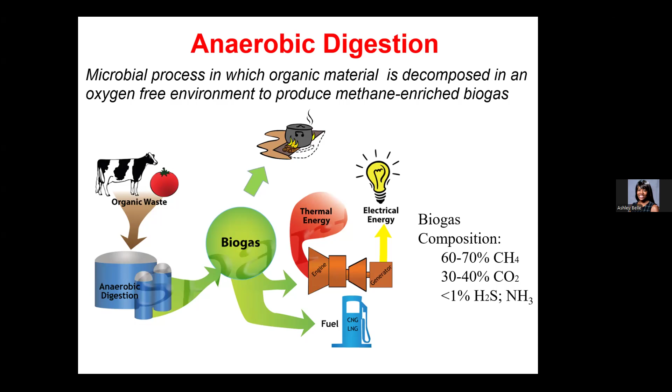Or you could even have biogas that is cleaned or upgraded. That means that we are removing the carbon dioxide and leaving only the methane behind. This gas can then be sold to the natural gas pipeline, or we can compress that upgraded gas and use it as a vehicle fuel.

Now, with anaerobic digestion technology, there are multiple applications, ways in which this technology can be used. It can be used at a smaller scale, like with a household digester. It can be used to divert food waste from being disposed of at the landfill. You may see them at a wastewater treatment plant, as well as at a farm where they're handling manures or crop residues.

So I do want to point out that even though the design of the digester may vary depending upon the organic materials that are being digested and decomposed, the same microbial based process is responsible for producing this methane enriched biogas. All right, so let's take a closer look at some of these applications.

So maybe in a developing country, you may find a small scale anaerobic digester located right in someone's backyard. It may look like this here. And they may digest manure if they have a few cows or a few pigs on their property, as well as any food scraps that they may have. This will produce enough biogas for maybe preparing 1 or 2 meals each day.

So here we have their stove with their biogas burner. But since biogas has a lower energy density in comparison to natural gas, which is made up of primarily methane, you may notice that the orifice on their stove where the gas comes out is larger.

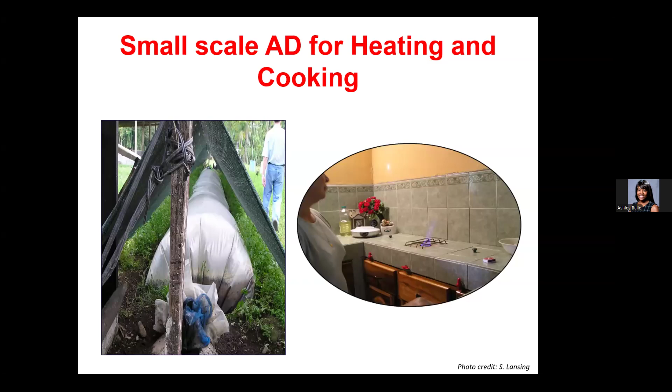And then, due to its high organic content, so there's lots of carbon in food waste, anaerobic digestion has also been used as a strategy for diverting food waste from the landfill. We may have heard that the US EPA estimates that more food is actually reaching our US landfills than any other materials, and this contributes to nearly a fourth of our municipal solid waste stream.

However, we are starting to see more and more states actually starting to ban their food waste from entering the landfill. So you'll see composting and energy recovery methods, such as anaerobic digestion, being increasingly used to handle this food waste. So if we divert this food waste from going to the landfill, not only are we saving space in the landfill, but we are also decreasing methane emissions that would otherwise escape into the atmosphere if we take advantage of digestion technology.

So we can also have an anaerobic digester at a wastewater treatment plant, and these are used to treat sewage solids. So those are the solids that are left behind after the wastewater treatment process. And shown here in this picture, we have the Urbana and Champaign sanitary districts. This is their Northeast treatment plant.

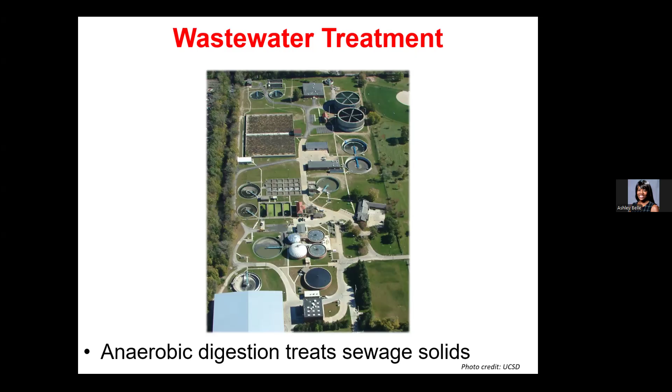So at this particular facility, they have 4 anaerobic digesters, and they handle things such as sewage solids, fats, oils, and grease, as well as food waste. And so for this particular facility, they use their biogas to generate electricity and heat for their plants, as well as they burn off with a gas flare a small percentage of the biogas that they generate.

All right, so moving on to our agricultural digesters. So instead of allowing methane gas to just escape into the atmosphere as livestock manure decomposes in an open lagoon where it contributes to greenhouse gas emissions, farmers have been encouraged to actually use anaerobic digestion technology to capture that methane and to use it as a renewable form of energy. So these particular digesters can be used to handle manures such as dairy, poultry, swine, as well as crop residues.

So I actually spent my graduate studies at the University of Maryland College Park, where I conducted digestion research at a USDA dairy farm. So I am most familiar with dairy manure-based digesters. So that's kind of going to be some of the focus of today's talk.

So I have another question for you. Anaerobic digestion is a microbial process where organic material is decomposed in an oxygen-rich environment to produce methane-enriched biogas. Is this true or false? All right, great job. So the answer is false. It requires an oxygen-free environment.

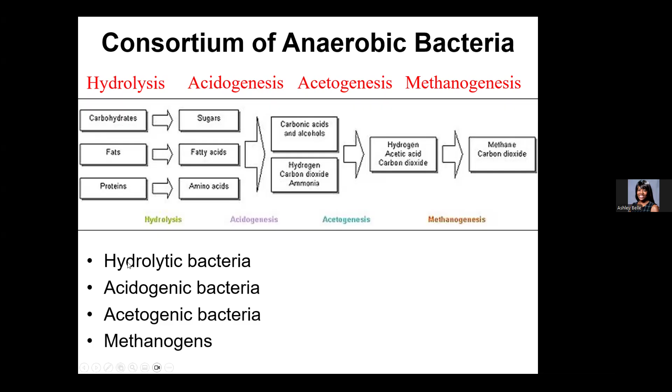And then in acetogenesis, those bacteria take those volatile fatty acids and they break them down into acetate and hydrogen and carbon dioxide, which are needed for those methanogens to create that methane-enriched biogas. So there are lots of different microorganisms in play in this process.

So we've talked about that anaerobic digestion technology. It can provide us with renewable energy, as well as when we capture that biogas, we're reducing methane. We're capturing that methane, so we're reducing greenhouse gas emissions. But I also want to point out that there are some additional benefits of anaerobic digestion.

And another product of the digestion process is effluent. So with effluent, this is the undigested solids and the liquid that comes out of the digester. So post-digestion, you can have solids and liquids that can be separated. And while the liquids can be used as, say, a fertilizer, this actually helps the farmer to reduce the need to purchase a commercial fossil fuel-based fertilizer, because during the digestion process, those nutrients become more readily available for plant uptake, because during digestion, those organic nutrients actually get converted to an inorganic form, which is favorable for plant uptake.

And then those solids that come out of the digester can be composted, and this creates a value added product. So you're able to generate a new revenue stream potentially, because those composted solids can be used as, say, a potting media for plants. You may see a farmer reuse it as bedding, or even some may use it as a soil amendment.

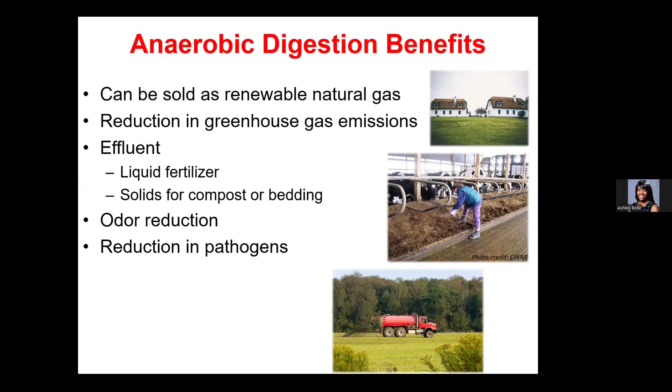All right, so we've talked about all of these microbes that are at play. So since we have this microbial process going on, the amount of biogas that is produced is going to depend upon the characteristics of the waste materials, as well as how you are actually operating the digester. So these here on this screen are some key factors if we want to maximize the amount of biogas that we're producing. So one of those being pH. Now with this microbial-based process, pH is going to play a very important role. It is very ideal for our digester pH to be maintained between, say, 6.5 and 8. This pH is optimal for methane forming bacteria.

Now, I do want to point out to you that digestion of food waste can have its limitations, because sometimes with food, especially fruits and vegetables, if they have a high simple sugar content, that material can break down so rapidly that you can get an accumulation of volatile fatty acids. And of course, those volatile fatty acids can cause the pH of the digester to drop. So when you have that pH drop, it can have an inhibitory effect on those methane producing bacteria from producing methane. So that's why oftentimes manure is actually placed into an agricultural digester with the food waste, because that manure has a good buffering capacity to help resist the changes in pH in the digester from that food waste that has been added.

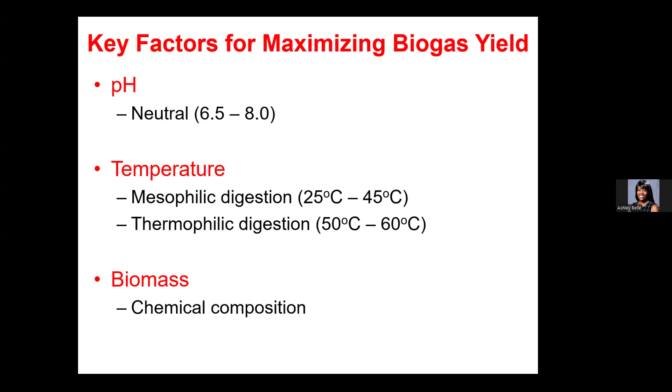And then again, the feedstocks you select should also be taken into consideration, because organic feedstocks with simple carbs, proteins, and lipids can be broken down rather quickly. So they're actually ideal for anaerobic digestion. Whereas if you have a feedstock that has a high lignin content or a high cellulose content, that's going to tend to be more resistant to microbial degradation, and it may need some additional pretreatment steps before being placed into the digester.

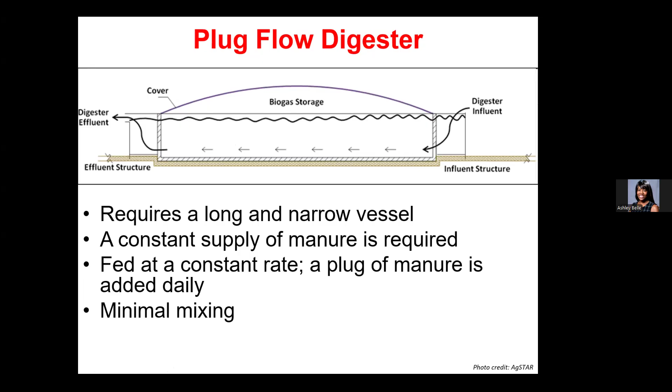So let me give you an example. Let's say that this particular digester is going to have a 25-day retention time. So that means if I put in a plug of manure on day one, it's going to travel through the system over those 25 days. And on the 25th day, when I put in another plug of manure, that digested manure, that first plug I put in, is going to exit out of the digester. This particular design is also considered to be a more simplified system because it involves few mechanical parts.

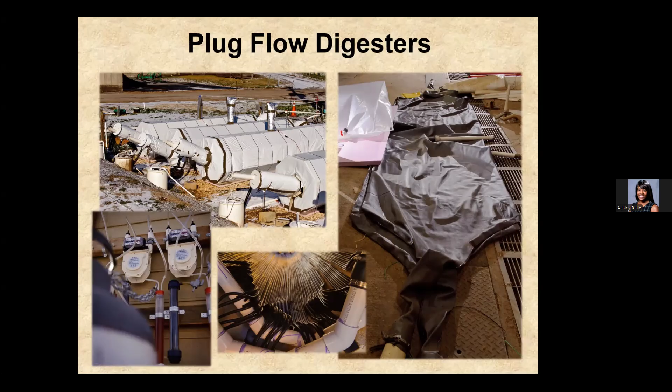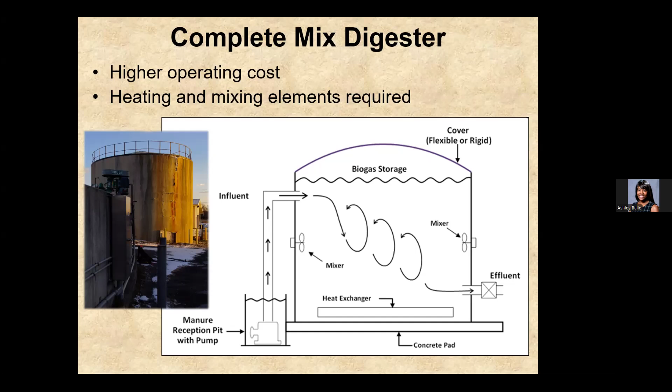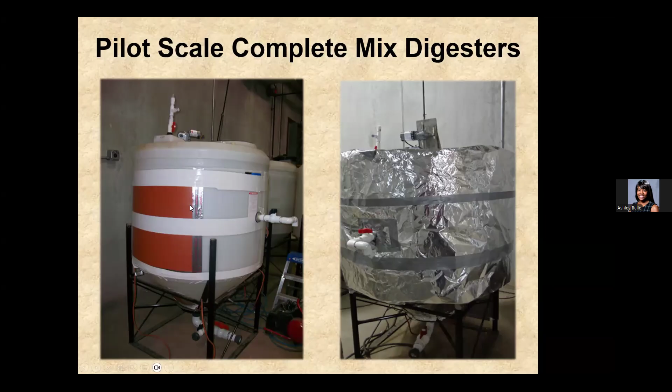All right, so shown here, these are some pictures of some research pilot scale complete mix digesters that we designed for field studies at the Beltsville Agricultural Research Center. So you can see here that these digesters were constructed from 850-liter conical tanks. And so these are plastic tanks. And we actually equipped these digesters with some silicone adhesive blankets in order to maintain that 35 degrees C digestion temperature. But we actually noticed that we were losing heat. So we actually built these reflective foil frames here around the digester to help encapsulate that heat.

And we also wired the digester's temperature control panel to continuously monitor and simultaneously control the digester's internal as well as the external temperature of the digester. So when that manure inside of the digester dropped below 35 degrees C, the heating blankets would turn on. And then for mixing, we wanted to minimize the settling of the solids in our digester. So we actually made these top mounted stirrers and we used gear motors as well as these custom made stir rods that went down into our digester.

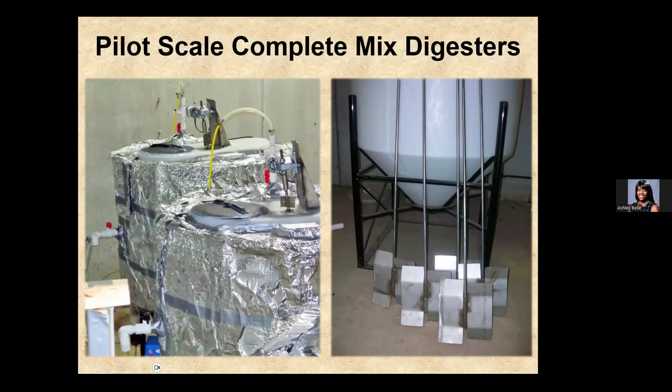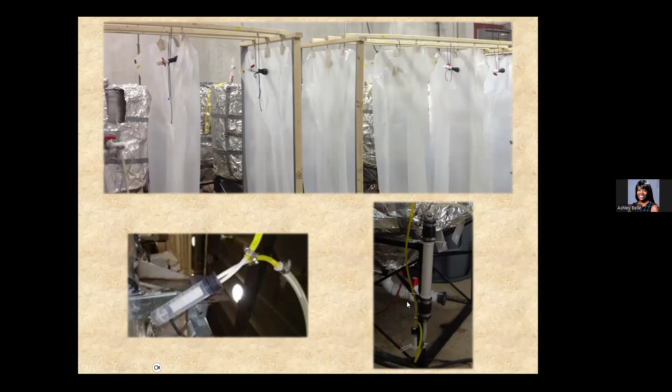Now, this is our finished product. So how our research complete mix digesters operated, we would pump in our manure into this bottom port right here. And on each digester, we installed these water sampling ports so that we could collect water samples to measure pH or volatile fatty acids because we wanted to know what was the health, what was the chemistry going on inside of our digester. And as biogas was produced, it exited the digester through this biogas collection port.

And you can see here, this is where we actually collected the gas sample to measure how much methane was in our biogas. So then the biogas flowed through the biogas collection port, and then it went through this moisture trap and desiccant trap to remove the water before it went into our bags. So you can kind of see down here, there's some discoloration at the bottom. So that means that desiccant is wet from the biogas actually flowing through it. So periodically we would have to change out this desiccant here.

Now, let's talk about the status of anaerobic digestion in the US. So AgSTAR tracks the status of US agricultural digesters as people voluntarily report that they have a digester. If you're not familiar with the AgSTAR program, it's a collaborative effort between the US EPA and USDA. They're encouraging the adoption of this technology because they want to reduce methane emissions that are associated with the livestock industry. So they want them to capture this generated biogas and use it as a renewable form of energy.

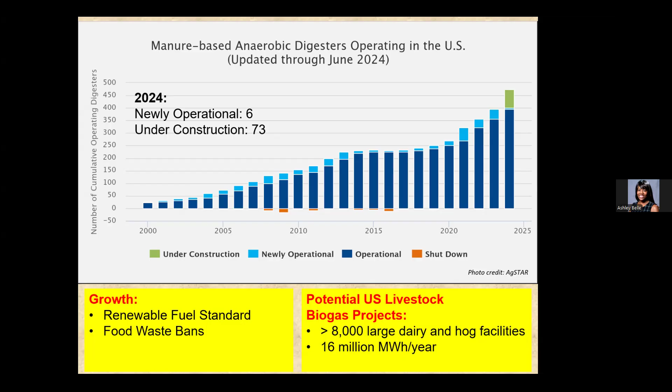So I kind of want to back up a little bit to point out Illinois for you. According to our AgStar database, in Illinois, we have 3 manure-based digesters that are operating. So up near Freeport, there is a digester that's operating at Hunter Haven, and that's using dairy manure. And then down in Peoria, that is another dairy, and that's Hillcrest Dairy. And then up near Galesburg, there's a pork digester that uses a covered lagoon. But I want to point out that with all of these digesters, the end use for their biogas is cogeneration, so heat and power.

All right, so let me launch another poll question here. Most digesters operating at livestock facilities in the US use what type of manure? Beef, poultry, swine, or dairy? All right, the answer is dairy.

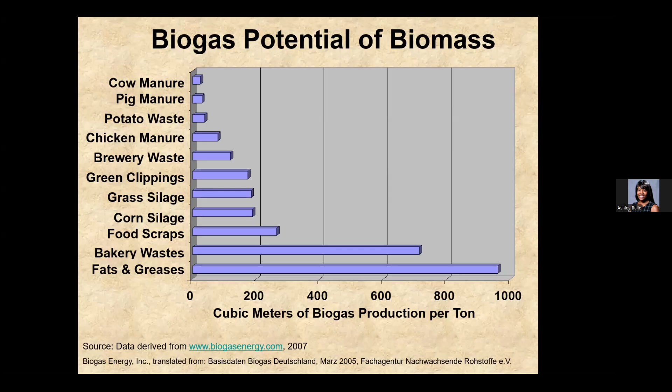Well, the answer is through co-digestion. So co-digestion means that you're adding another organic feedstock to the dairy manure, which can increase the biogas yield. And this can be a possible solution for making anaerobic digestion technology viable for the small to mid-sized livestock facility who may have been once limited by their animal waste capacity.

So I have actually conducted research looking at ways to increase biogas production of dairy manure-based digesters. Some of my research has focused on investigating forage radish cover crops as a renewable source of energy and using this particular cover crop as a co-feedstock to increase biogas production of these manure-based digesters. When I say co-feedstock, I mean that we are adding radish cover crops to the dairy manure digester. And here we have our forage radish down here. So you may be thinking, what led us to study forage radish cover crops as a co-feedstock for these dairy digesters?

Well, at this particular point in time, there was increased interest among farmers who were growing forage radish as a winter cover crop because they wanted to achieve multiple soil and environmental benefits. Typically, this forage radish is planted immediately after they harvest the corn silage about mid-August. And the cover crop doesn't compete with food production, as most dairy farms have traditionally left their fields bare after the corn silage was harvested. This forage radish was attractive to farmers because it increased crop yield and suppressed early spring weeds.

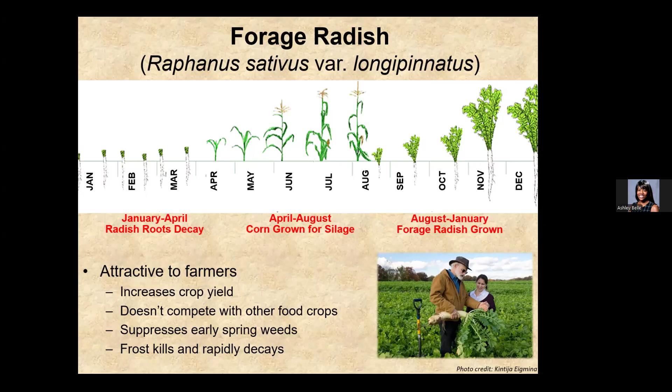Now, typically, this forage radish would not be harvested because after several consecutive nights with temperatures below -6 degrees C, this radish crop would winter kill, typically in late December or January, and that crop would rapidly decay, leaving behind this clean and enhanced seed bed. So for our research, we thought, could we possibly obtain another benefit from this radish crop by harvesting the above-ground biomass prior to winter kill and using it as a co-feedstock in our digester with our manure to increase biogas production? And we figured out through our research, yes, we could do that.

So shown here, this is our co-digestion feedstock. We harvested the above ground biomass, and this consisted of the entire shoot plus a small portion of that fleshy root that extended above the soil surface. And by harvesting only the above ground biomass, those benefits of increased topsoil fertility, weed suppression, compaction alleviation, those still remained because that below ground root was left to decay in the field.

These are some pictures of us harvesting the radish. The radish was first mowed with a rotary mower as close to ground level as practical. This was about 3 to 5 centimeters from the soil surface. Then that windrowed radish was forage chopped and blown into an adjacent wagon for collection.

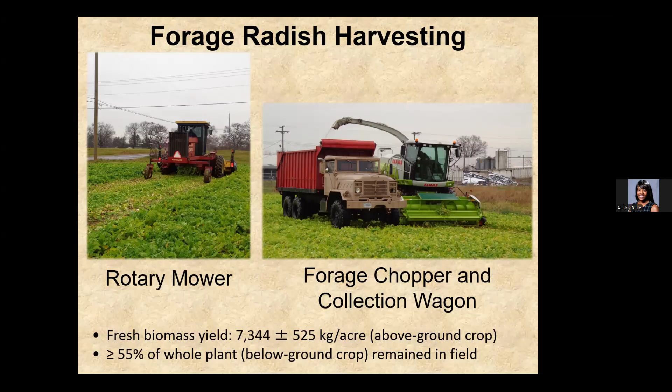And from this particular harvest, we collected about 7,000 kilograms per acre of above ground biomass. So it was actually estimated that we left at least 55% of that whole plant, so that below ground root remained in the field for decomposition. So this is just giving you a closer look at how the radish looked after harvesting. But it should be noted that radish has a high sulfur content. And so remembering we're working with a microbial-based process, sulfur can have an inhibitory effect on methane production.

So we're going to get a little bit into the research aspect of it. Now, we wanted to determine if co-digesting with radish could increase biogas yield. So we used 2 independent field trials that we conducted, and we used our research pilot scale complete mixed digesters for these experiments, and they operated in batch mode. So what I mean by that is that all of those organic materials that we placed into the digester on day 1 were allowed to digest over a 35-day period.

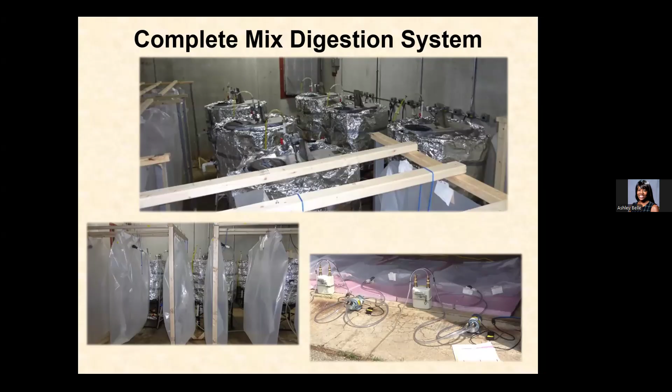Now, shown here, this is just a bird's eye view of our experiment. You can see that we had 6 complete mixed digesters here for each of our field trials. So for the field trials here, the digesters either contained a manure only or a radish and manure co-digestion mixture. So for trial 1, we actually utilized a 27% radish mixture and a 13% radish mixture in trial 2.

Now, I do want to point out to you that from our lab studies, although it was shown that increasing radish additions increase methane production, we actually decided to utilize these smaller radish loading rates because, for one, an existing dairy digester may not have the additional space to accommodate larger additions of radish. And then secondly, we also wanted to minimize clogging our digester system with solids. And we also wanted to avoid putting an excess strain on our digester mixers.

So if you look here, we have right here our radish plus manure digesters. Relative to its manure only digester, you can see that the radish plus manure digesters initially experienced a lag in methane production. Now, this could have been due to methane production being inhibited by the sulfur content of the radish, or a longer acclimation period was required to digest the radish.

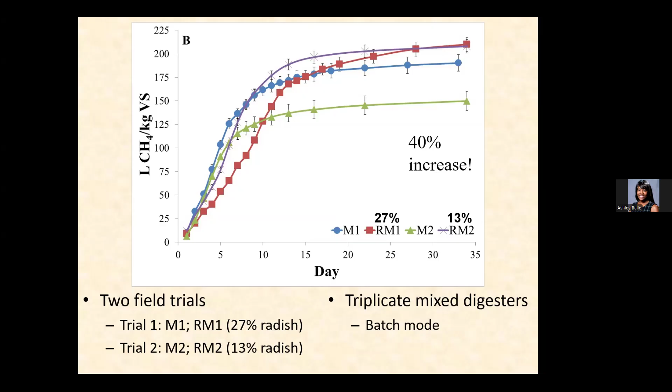All right, let's do another knowledge check here. Co-digestion is the process of breaking down two or more types of organic feedstocks simultaneously in an anaerobic digester. True or false?

All right, great. The answer is true.

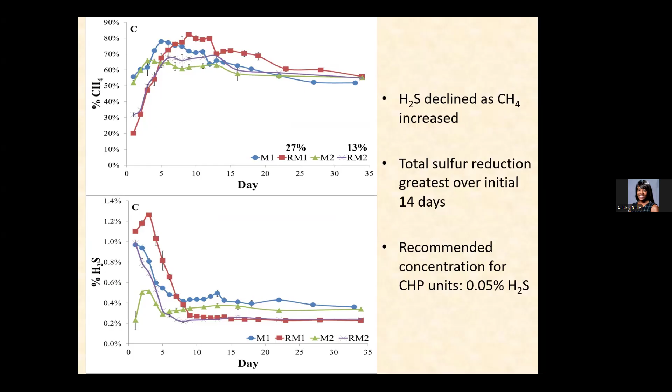All right, so let's look at some models that we've seen at farms to make anaerobic digestion a viable technology. So instead of a farmer owning and operating a digester, the digester is owned and operated by a third party. So how this works is that the farmer actually leases their land to this third party, and that third party constructs and operates the digester.

And then the farmer will also pay a small amount of money towards the digester, and they'll provide the feedstock to the digester. So with this particular model, the farmer doesn't even have to have the technical expertise to operate the digester, and it kind of lessens the risk for the farmer as the third party is actually responsible for operating the digester.

And in another model with these centralized or community digesters, if there are several farms located in close proximity to each other, the community digester model can be utilized where the farmers actually share the installation and operating costs of the digester. And so they will take their waste and transport it off site from the farm to the centralized digester.

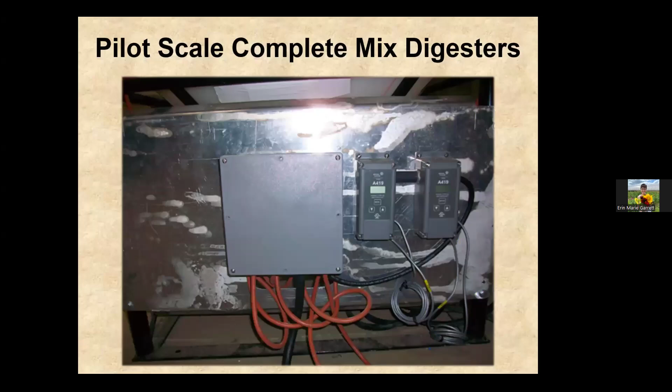Someone asked, kind of comparing the energy inputs versus the outputs. So the energy input to build the system and harvest or gather the fuel source like your manure, your crop residue, versus the energy created in the long run. How does that kind of even out?

So I will say that this was for our radish studies. We definitely used a lot of energy to even grow the radish, harvest the radish, get it into the digester. So that is a point that you definitely want to take into consideration of what those energy balances look like, the inputs versus how much biogas you are able to produce. But from a laboratory standpoint, as well as from the small scale in the field, we saw that we could increase biogas production. So there is more work to be done for this particular research of finding out how we can optimize that energy balance from input versus output. Okay, awesome.